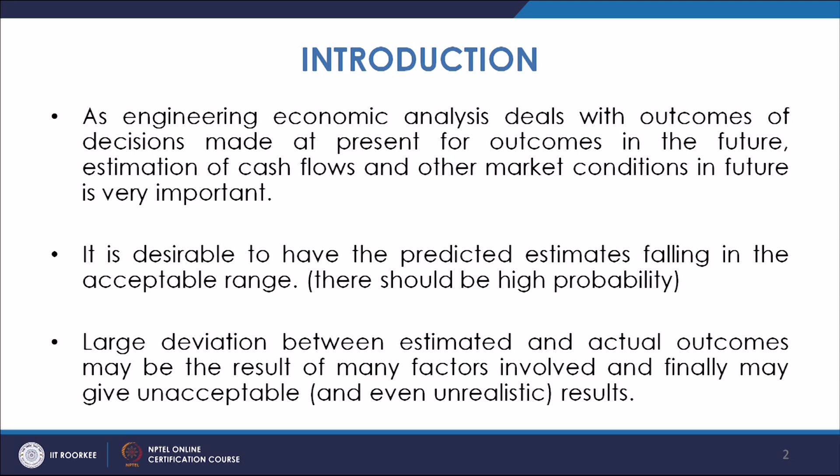Now while estimating all these parameters, if we make errors in estimating each of them, their cumulative effect can be even more. So if there is large deviation, it may result in unacceptable type of results, and there may be even unrealistic results. So estimation is a very important process, and there must be a very good estimator who should estimate more and more accurately.

Now we will discuss different aspects which are to be looked into while doing cost estimation. First is the elements to be estimated. Now what are the elements which we estimate?

Basically, first you have the estimation of output. First of all you see what output you need. Output can be, if you say manufacturing operations, number of units of liquid metal or number of forgings to be done - all these are outputs. So first of all the output has to be in mind, what output you need. Once you have the outputs, the output may even be for the satisfaction you have to achieve, or for the number of units to be sold for any particular product - all these come under output.

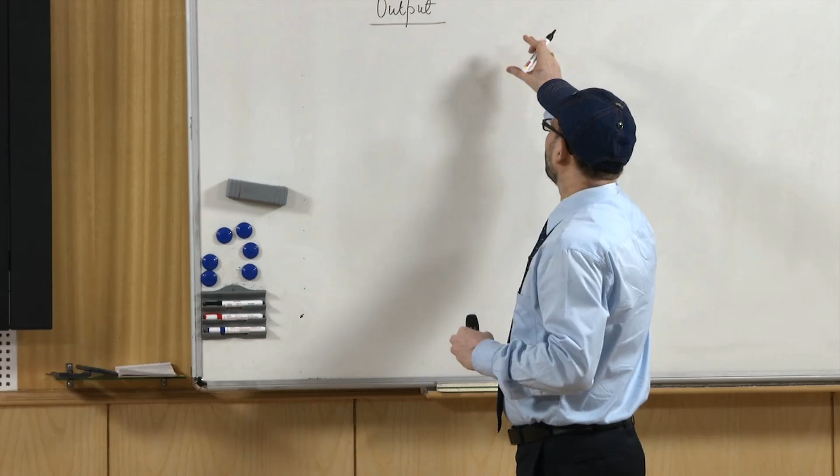That is to be estimated, and can be estimated by different processes. If these are products going into the market to be sold, it will be done by market surveys and research into that area. If these are in the area of manufacturing, you can have the idea of these outputs by weighing or by having the idea physically.

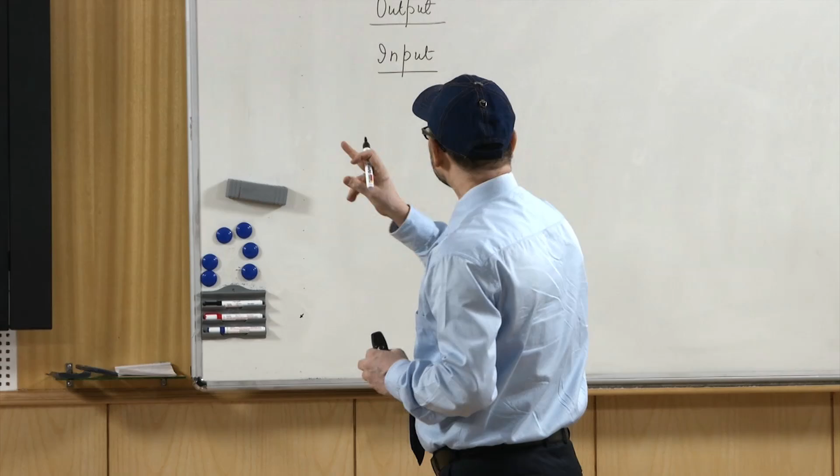Now once you have the estimation of output, you need the estimation of input. These are the elements which are to be estimated. Once you have the estimation of output, you need the input required for getting this output. Input can be in terms of raw materials if it is an engineering activity, input can be in terms of machines required for the operation to be done, input can be in any form. So basically the elements to be estimated are the main parameters which are to be estimated.

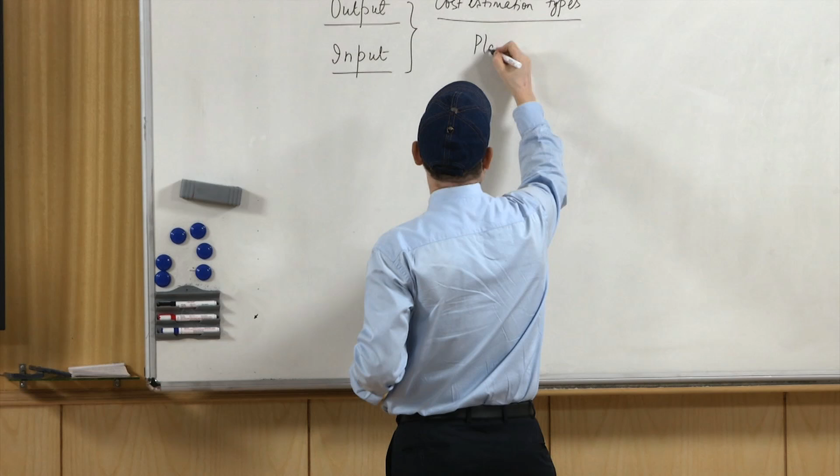Now, cost estimation types. We will discuss different situations, how at different stages different types of estimations are carried out. When we want to estimate something, when we want to have a certain output, initially we have a planning stage. In this stage, basically we do the analysis in a very broad manner, and the accuracy is of the order of plus or minus 50%.

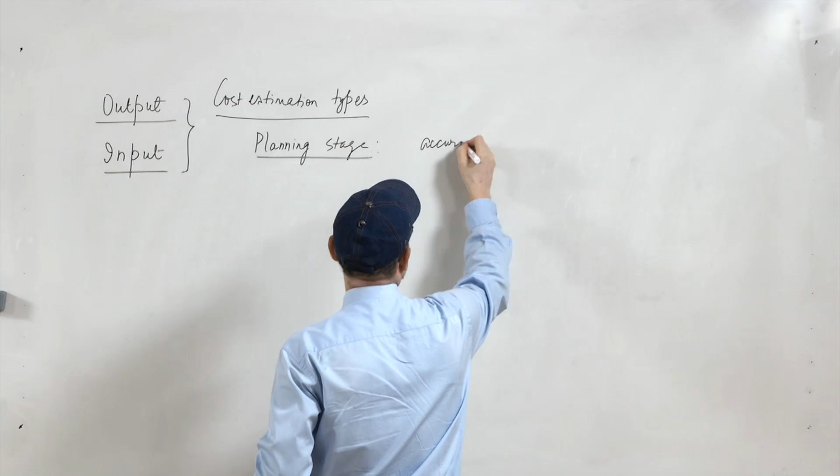This is done through conferences and symposia. We have some idea in mind, something has come into the mind of the organization, so that you develop some unit. For that there are meetings, symposia and conferences, and very broadly the estimation is done there, normally with a deviation of the order of 50%. Then comes the design stage.

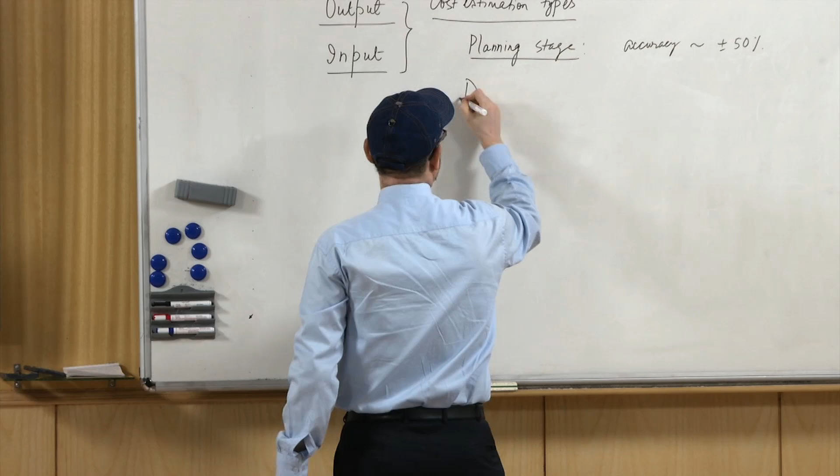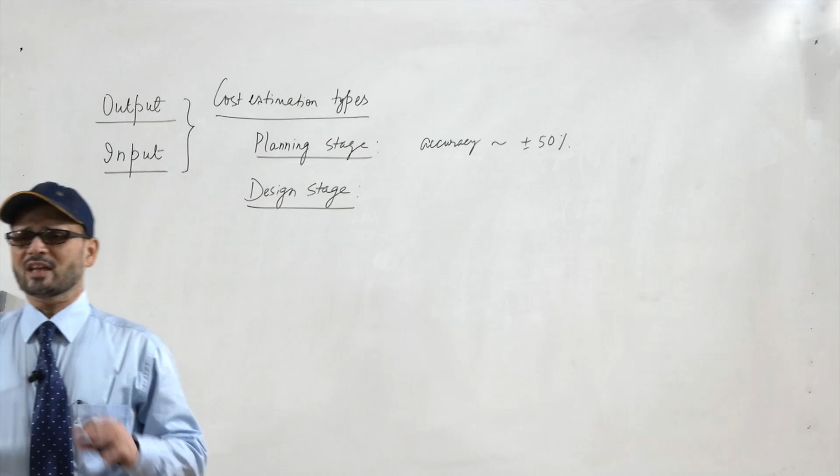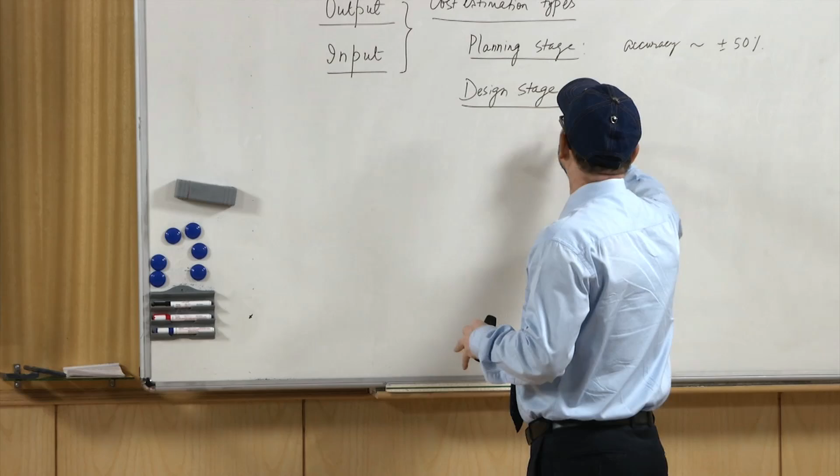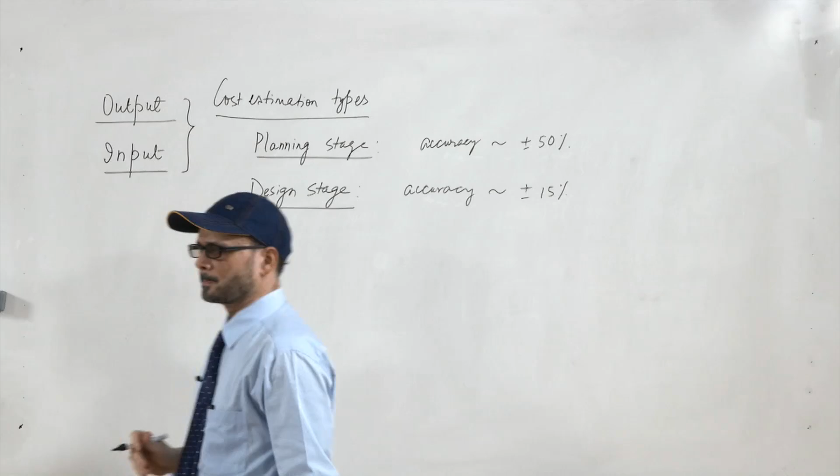Now, once you have given the OK for the project to go ahead, then comes the design stage, where it is decided which process to be adopted, how to go ahead. This is known as the design stage, and here accuracy is said to be of the order of plus minus 15%. The planning is done, how to use, which machines to be used, all that, and this is basically the design stage. Then comes the implementation stage or construction stage.

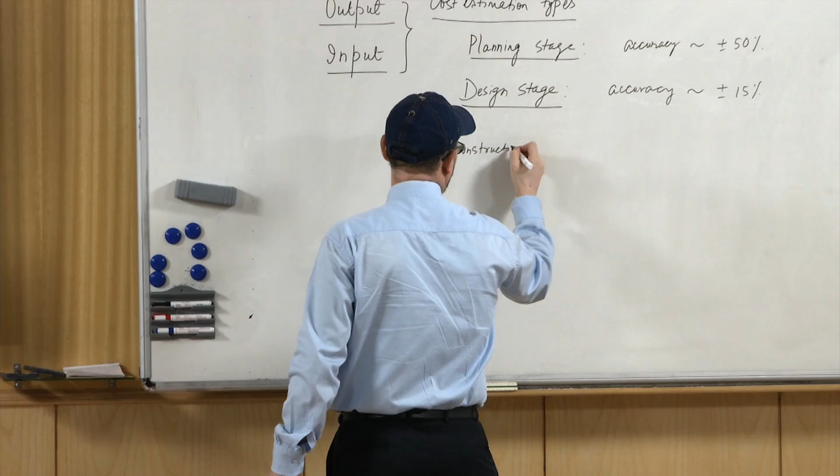Once this is also finalized, then you go for the construction of the project, and for that all the minutest level of details are to be furnished. Here come the persons who are basically the experts, they will talk about all the minute details, and the deviation here will be not more than about 5%. So, accuracy you can say will be close to plus minus 5%.

So, basically this estimation types we discuss about what kind of estimation we do depending upon the importance.

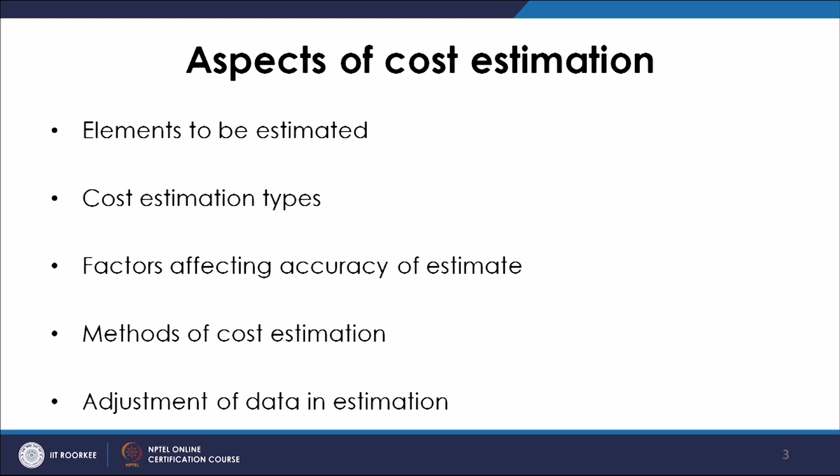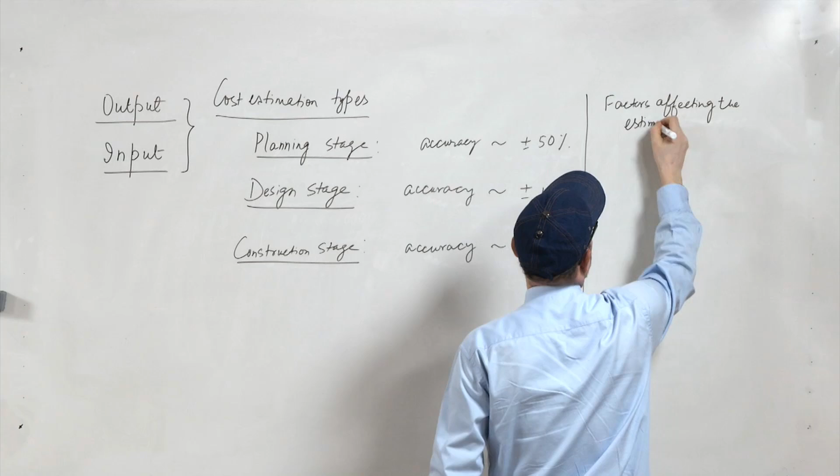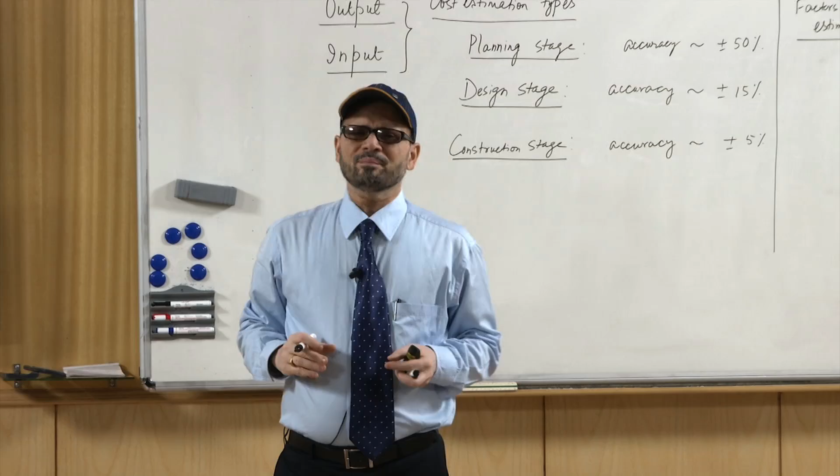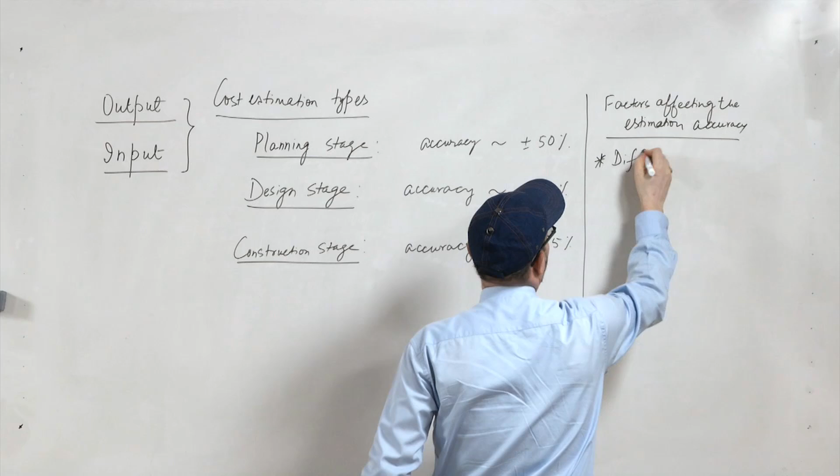Now, let us see the factors affecting the accuracy of estimate. There are certain factors which talk about how the estimation should be done. The first factor is the difficulty of estimation. It depends on what should be the level of detail you need, what is the difficulty level of the estimate. Depending upon that, you have to see what type of estimator is required, what should be the expertise of the person who should be doing it.

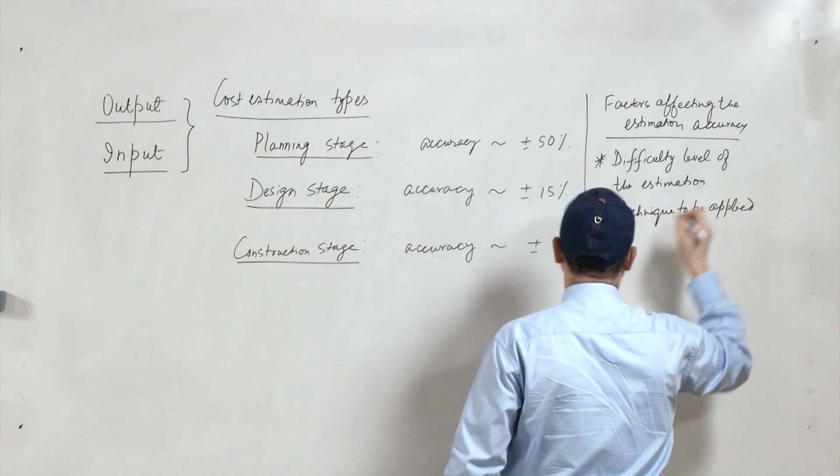Now, once you have gone through the difficulty level of the estimation, you have to see which technique should be applied. You have to be aware of all the kinds of techniques which are required for your estimation.

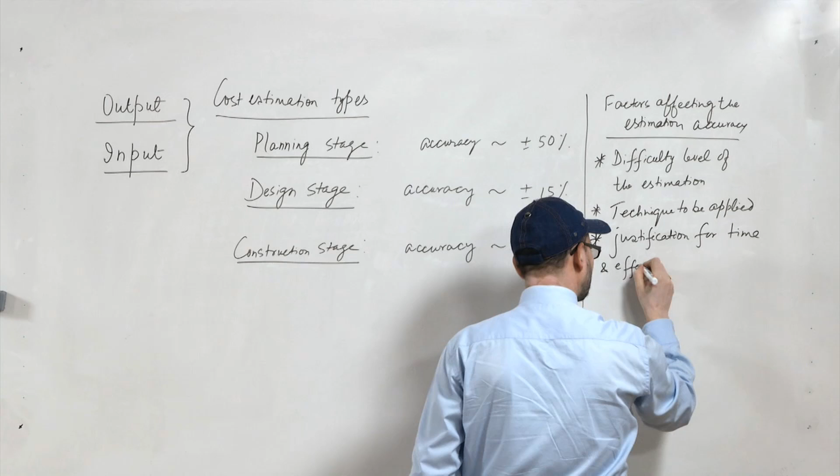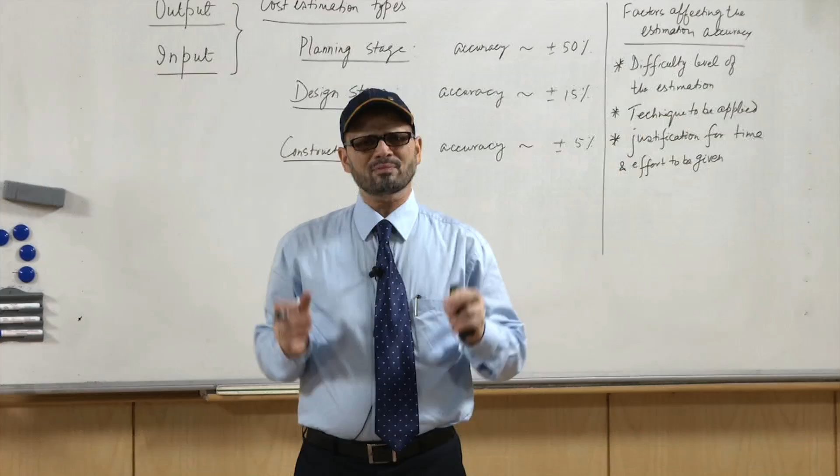Further you have to also show the justification for time and effort to be given. Basically you also have to ascertain what is the importance of this estimation. If any estimation takes a large number of resources, large resource time, in that case it must be very important work. So, depending upon the importance of the work, that justification is required to be given.

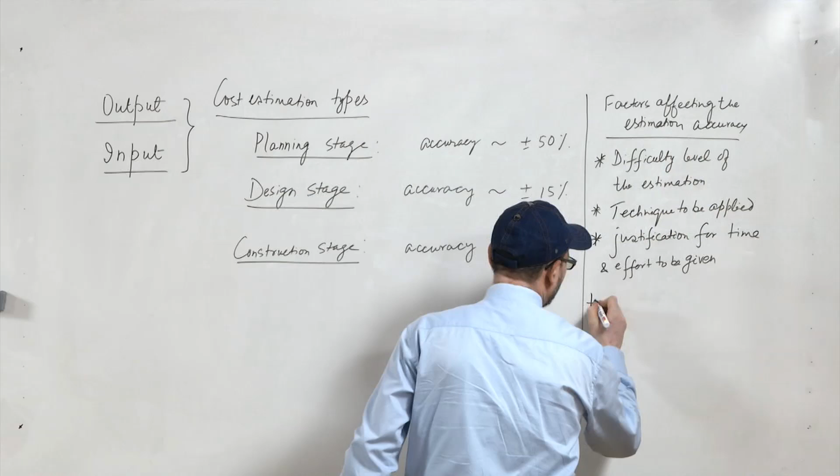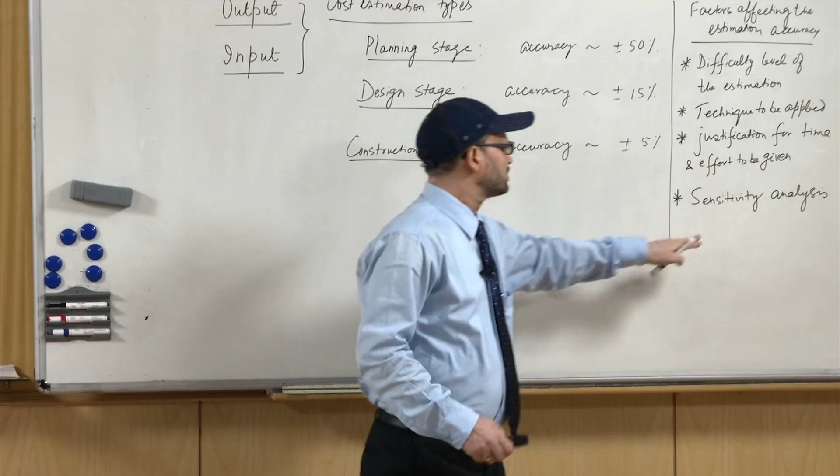Now, we also have to see the sensitivity analysis. By sensitivity analysis, it is meant that there are different parameters, and the study is to be carried out on how the end result is affected by changing the parameter levels. So, these are the different areas where you need to focus and decide what level of estimation is required to be done.

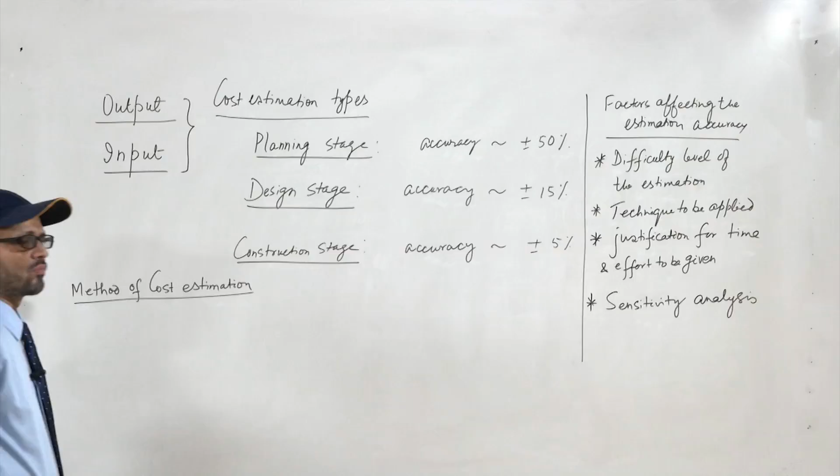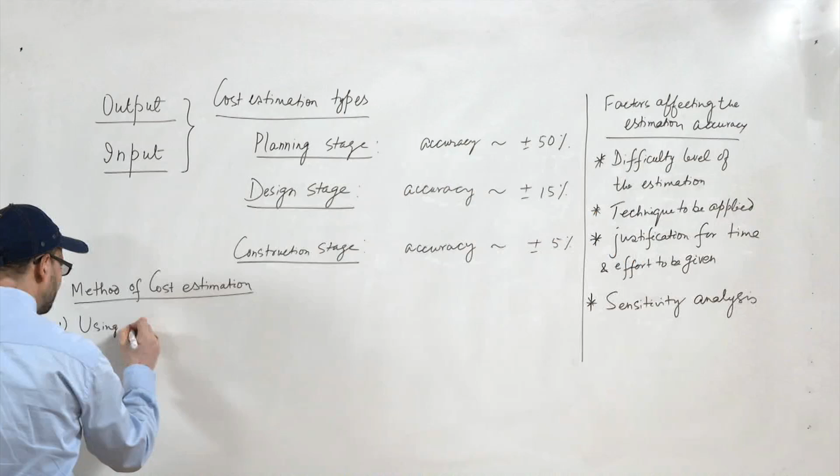Now, method of cost estimation. While we do the estimation, there are many ways by which we do the cost estimation, and first is using engineering analysis or procedure. This means that if it needs any engineering activity, you have to specify all the details in the form of blueprints, in the form of the process chart, so that proper estimation can be carried out.

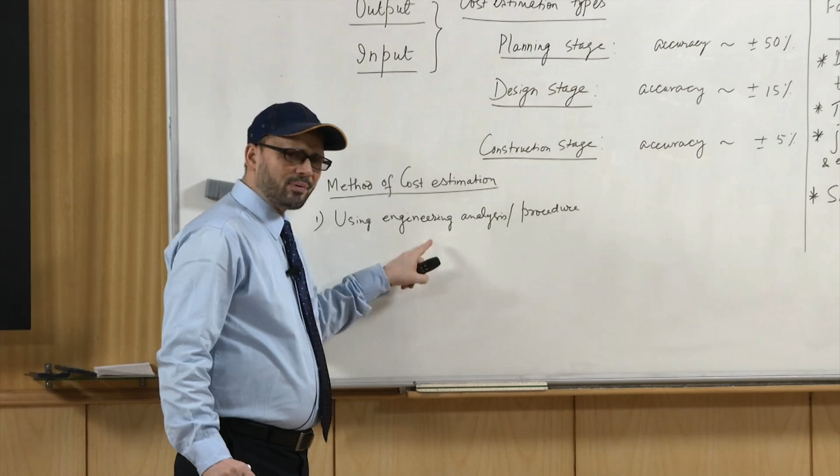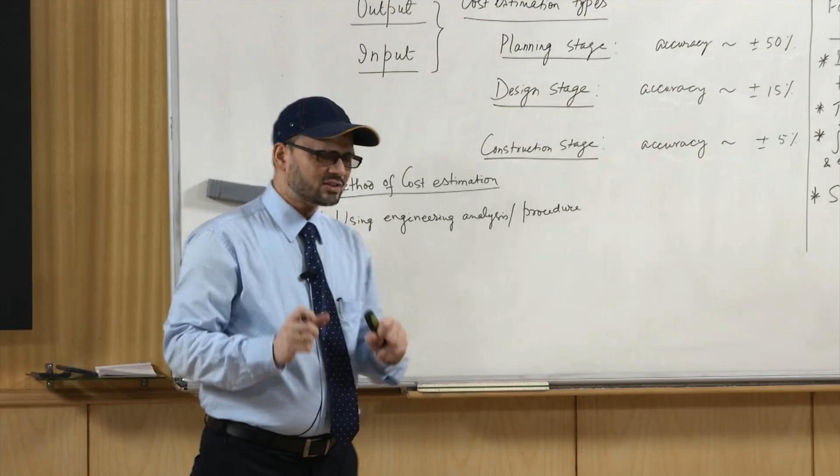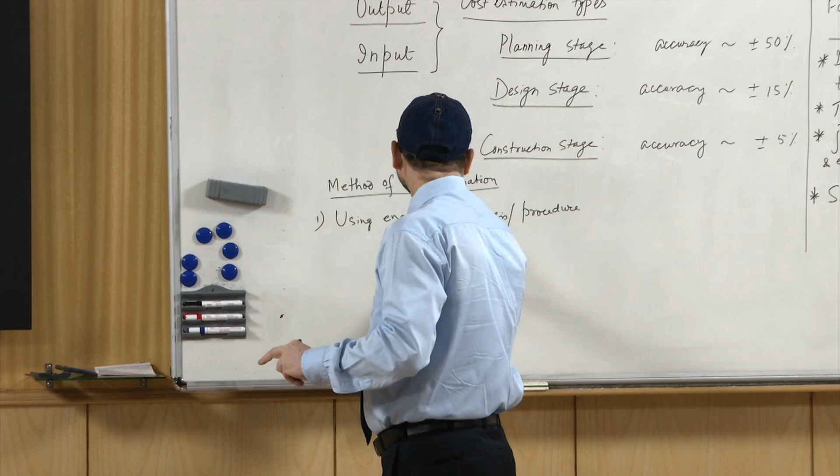Also, suppose you are doing the estimation related to selling a product or manufacturing a unit, every detail should be prepared in hand, all the engineering activity which is to be done, all these must be properly addressed, and then estimation will be easy. It will tell why any estimate has given a particular value, because all these calculations will be based on engineering principles. So, this is known as estimation using engineering procedure.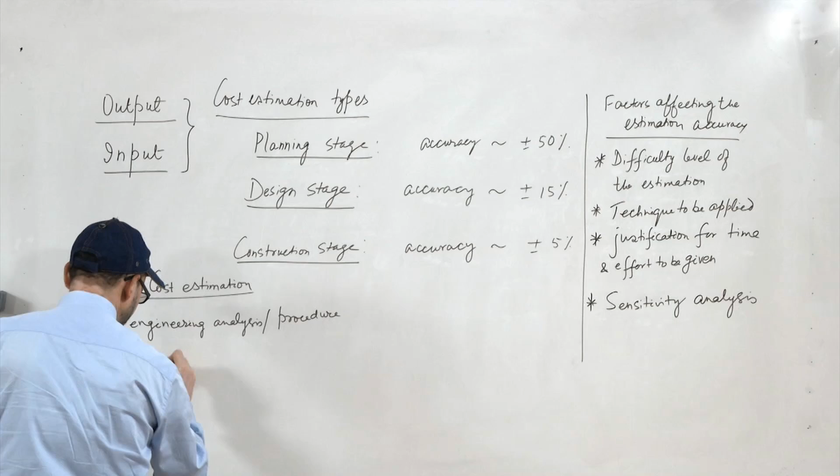Next, sometimes it is very difficult to estimate by engineering procedure, especially when you are estimating something very new. So that time we use our past experience, the study by analogy. This happens many times when, although the unit being produced is similar in characteristic to existing units, the cost is very difficult to predict. In that case, the person who is expert in that area can, by analogy, have a better estimate.

Suppose the first time a helicopter is to be made, an estimation of the cost of a helicopter is to be made. Now, this helicopter has not been manufactured earlier and there is no idea what cost will be incurred in making a helicopter.

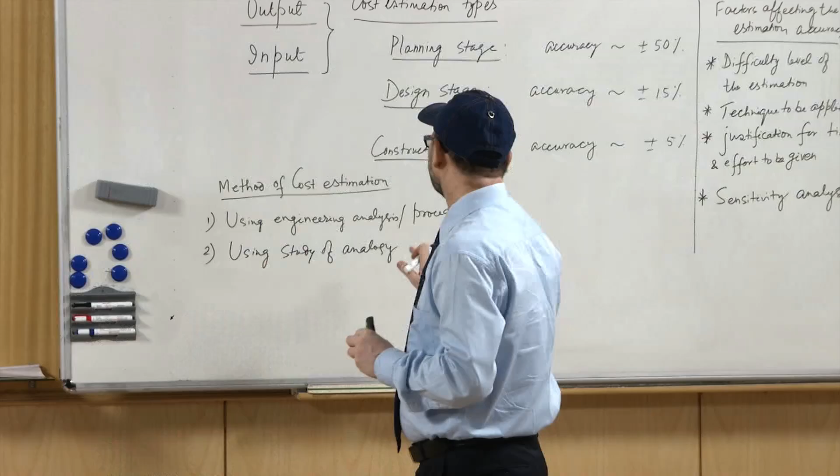It is also known what will be the cost incurred when you make an aeroplane. So a person who is expert in the knowledge of aeroplane making will basically model and give the idea that if you are making a helicopter which has a certain capacity, using a fraction of the material used in the aeroplane, or an engine much smaller than the aeroplane's engine, by analogy he can do the analysis and give a better estimate of the product he is estimating.

Now we will discuss about adjustment of data in estimation. We need many a times to adjust the data.

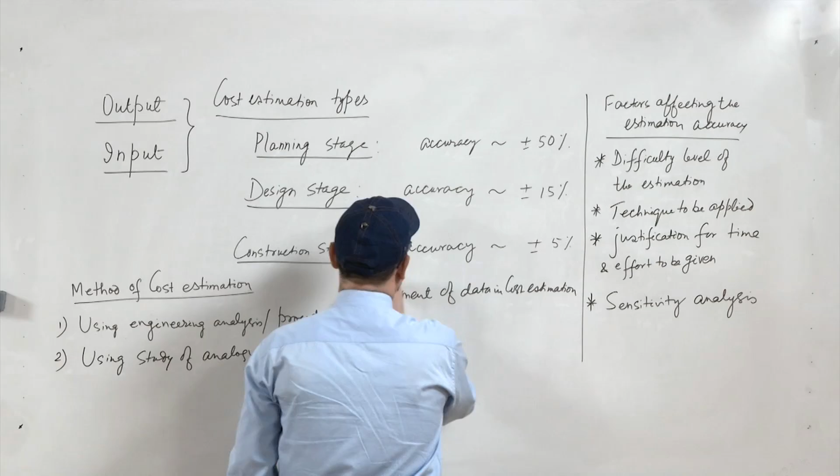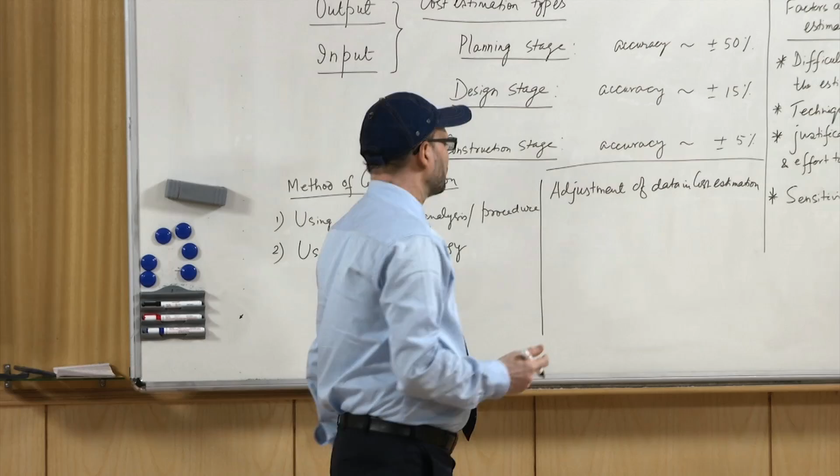You have different categories of data which are to be handled, and you need to put the data of one category at one place. If you are using materials for a particular part, you should know that this belongs to a certain category. So basically data adjustment of different categories is required. First of all, you should know how to categorize the data.

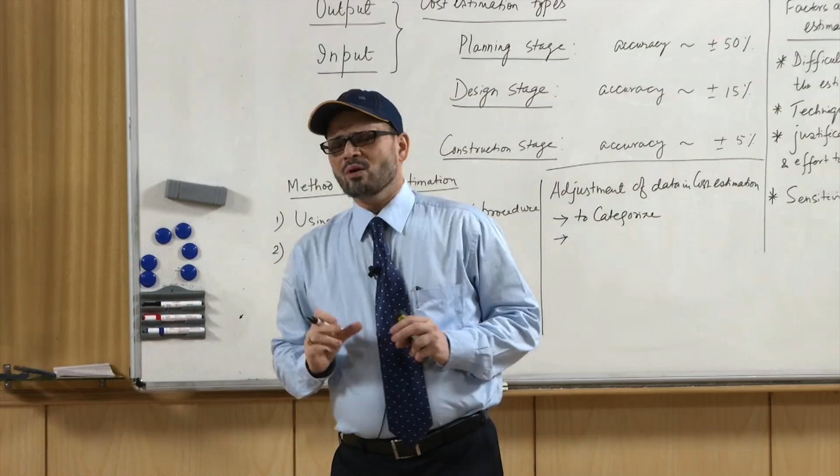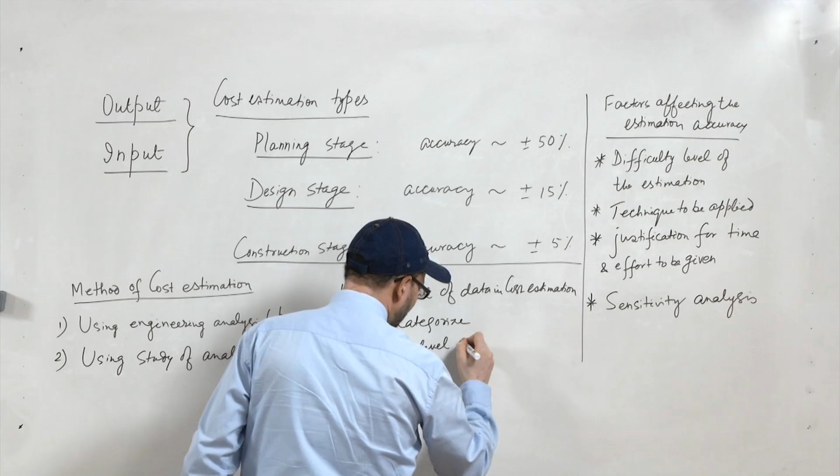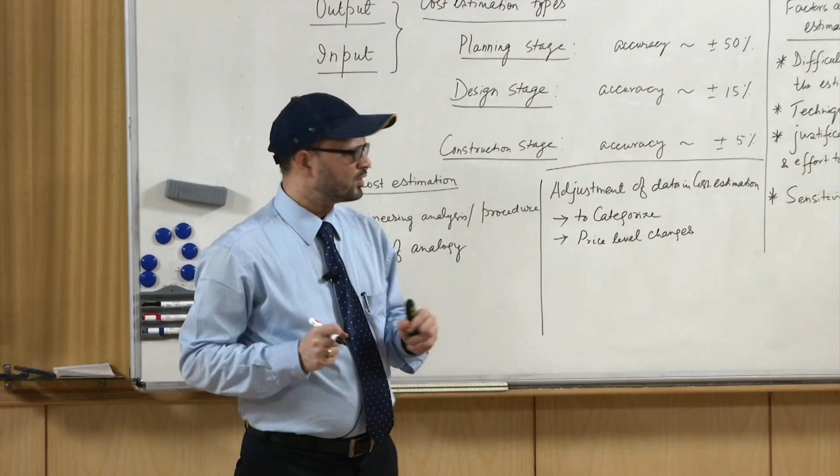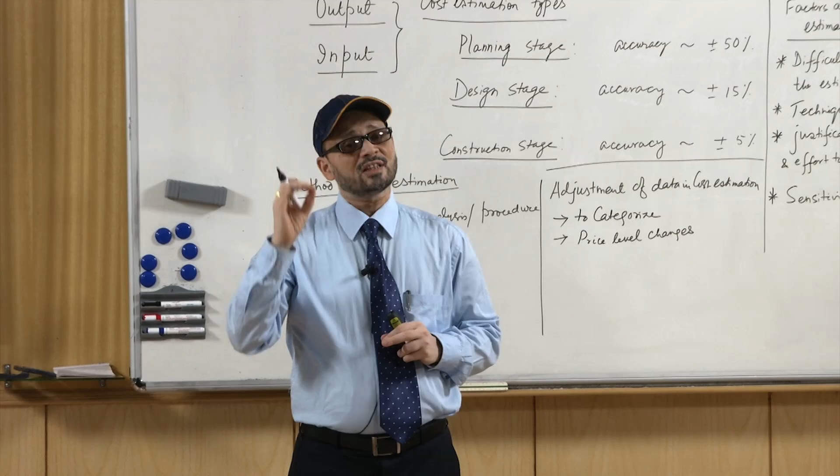The next important thing while discussing the adjustment of data is the effect of inflation or price level changes. Because economic analysis is done for any estimation in future, and since every transaction involves the use of money, the time value of money has to be kept in mind. So with time, what will be the effect on the worth, or the cost of units in future, this is to be kept in mind.

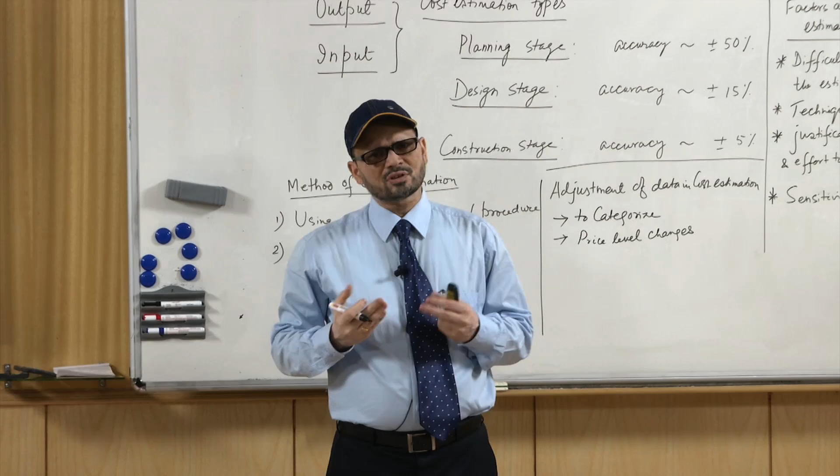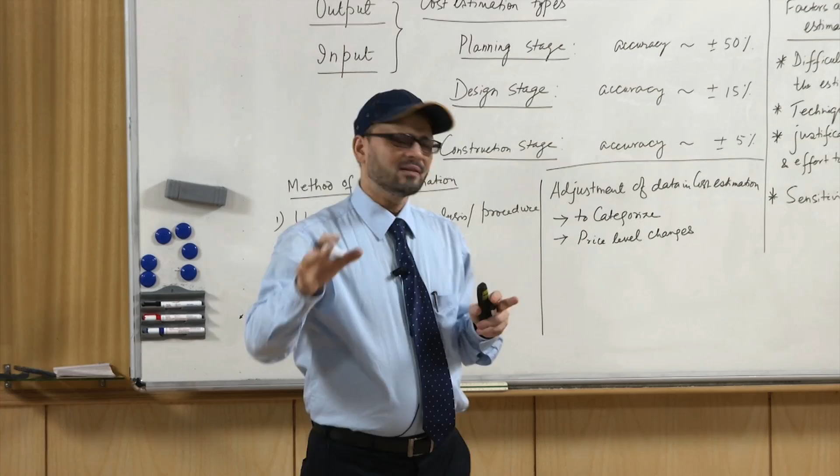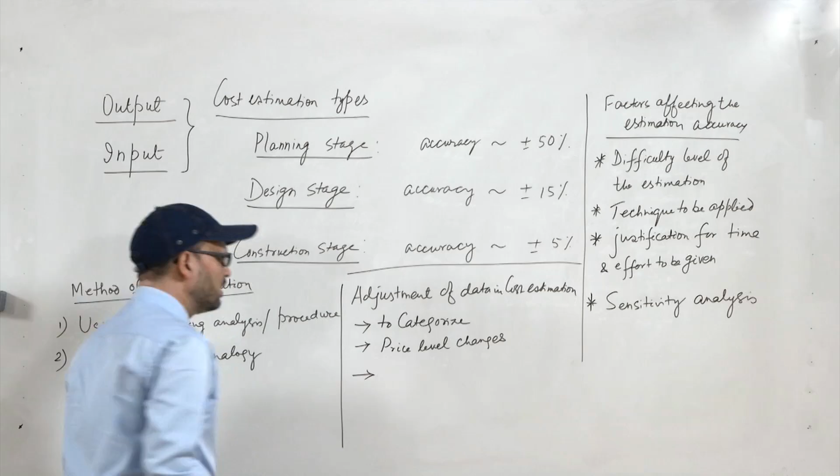So price level changes are to be kept in mind. For that, you need certain past data which talk about the inflationary changes, the change in the value of money in the past few years, and based on that you can predict certain changes in the value and price. This way, if you take this into account, you can come to a reasonably accurate cost estimation.

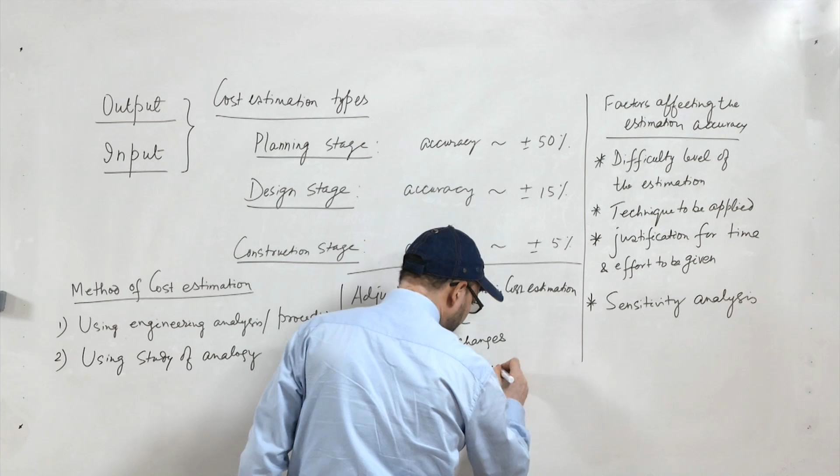This learning is basically a process which means that the direct labor hours required to make any component, when you are making this component for the first time, takes certain hours. But as you go on increasing the number of units and making these units, especially for those items which are very large in size and take a large amount of direct labor hours...

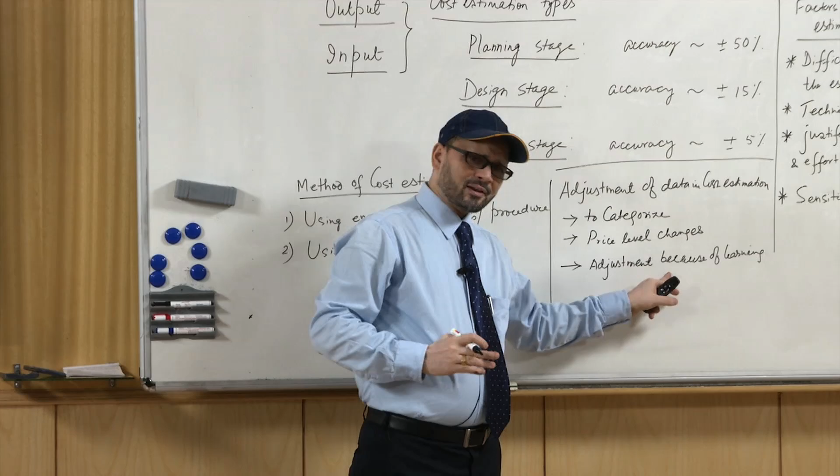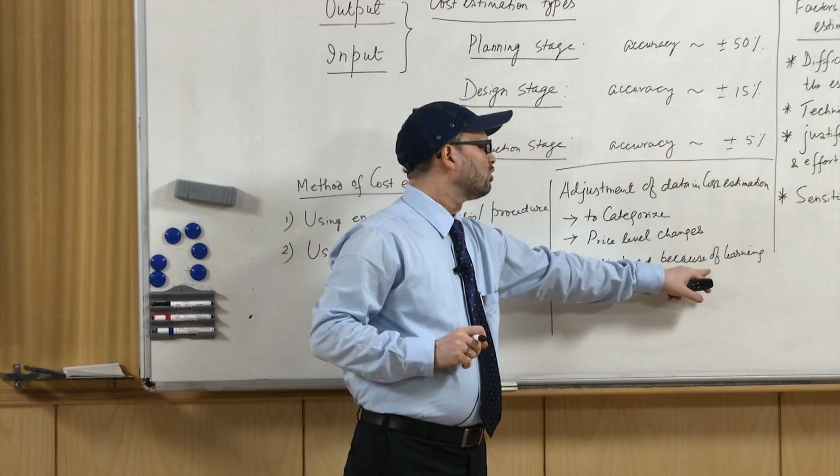It is seen that as you go on doubling the number of units produced, the direct labor hours reduce by a certain factor. This is known as the concept of learning. The amount of direct labor hours may reduce by any factor, it may reduce by 80%, it may reduce by 70%. If it is reducing to 80%, it is known as an 80% learning curve.

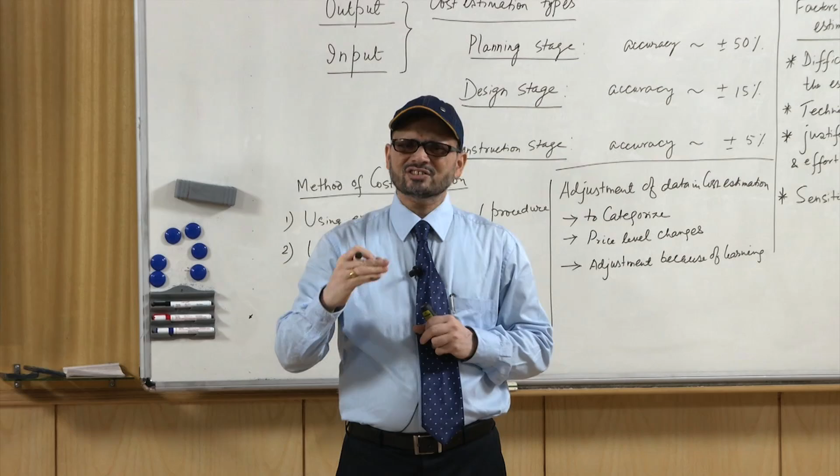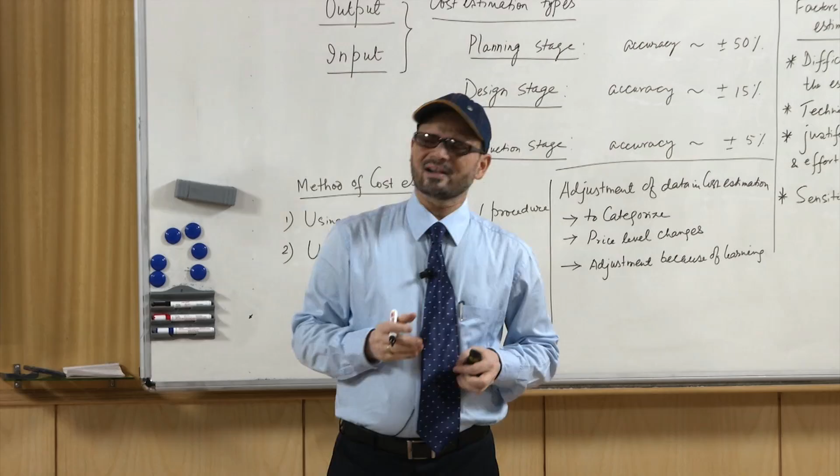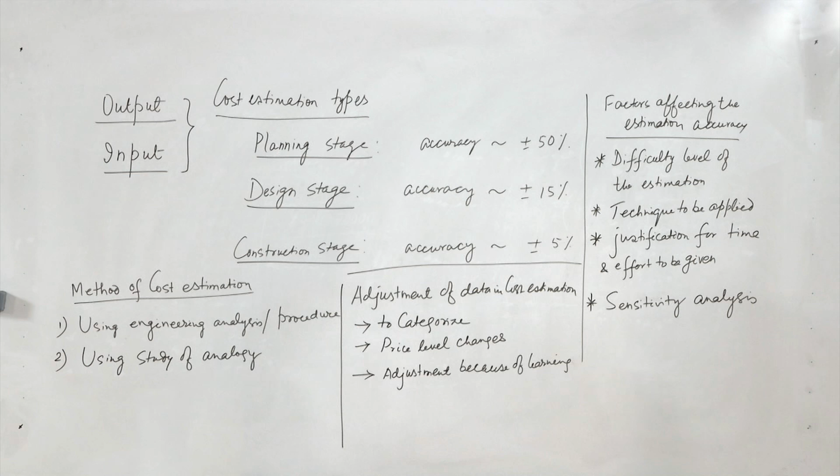This means if for the first unit you are taking 100 direct labor hours, the second unit using an 80% learning curve will take 80 hours, and the fourth unit will take 0.8 times 80, that is 64 hours. So this is the learning curve. We will see how this learning curve can be used to adjust the cost data while making any unit in the future. Let us discuss about the adjustment because of learning.

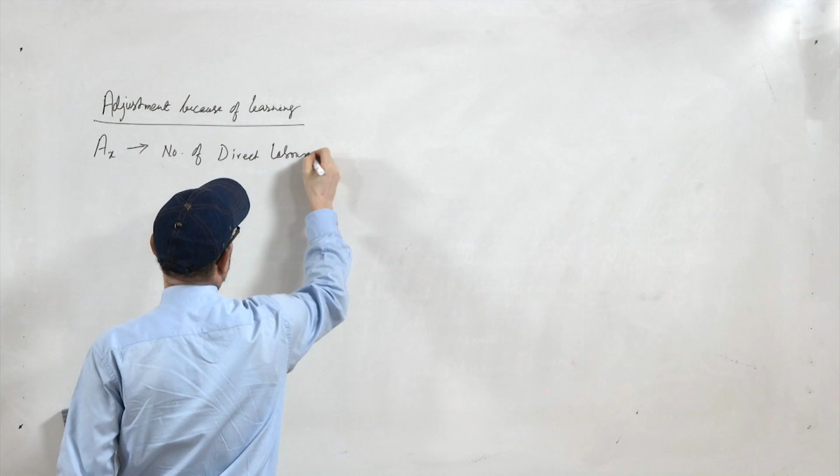Now let us say you are making any product where Ax is the number of direct labor hours required to make the xth unit. X is the unit number. So A1 means the labor hour required for making the first unit, A2 will be for the labor hour required for the second unit, and so on. Now F is the number of direct labor hours required to make the first unit.

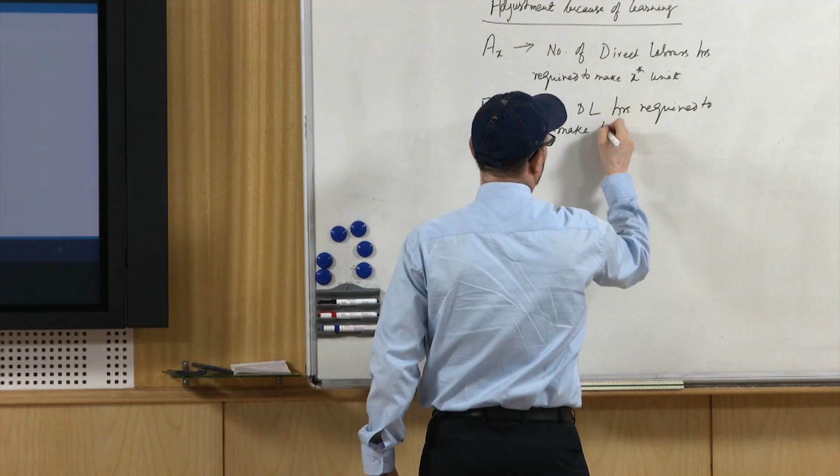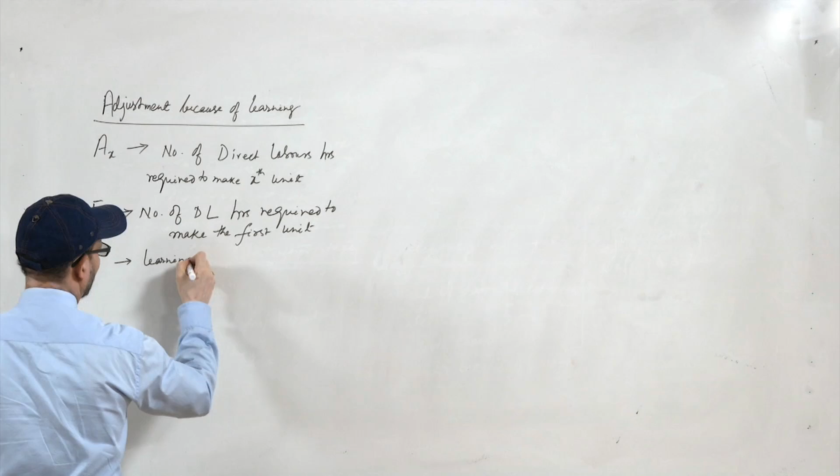Now let us say alpha is the learning curve. So what we see is, if we see Ax as f into alpha to the power 0, when the first unit is produced, that is when x is nothing but 2 raised to the power 0, that is 1. So for first unit, when x is 1, the number of direct labor hours is f, and it can be written as f into alpha raised to the power 0, where x is 1, so it is nothing but 2 raised to the power 0.

This is based on the assumption that every time you double the production, the number of direct labor hours required will be some factor times the labor hour required in the previous time. So if suppose you take A2, Ax will be f into alpha 1, and it will be 2. So you can write x as 2 raised to the power 1, that is 2. So this one comes here and this is 2.

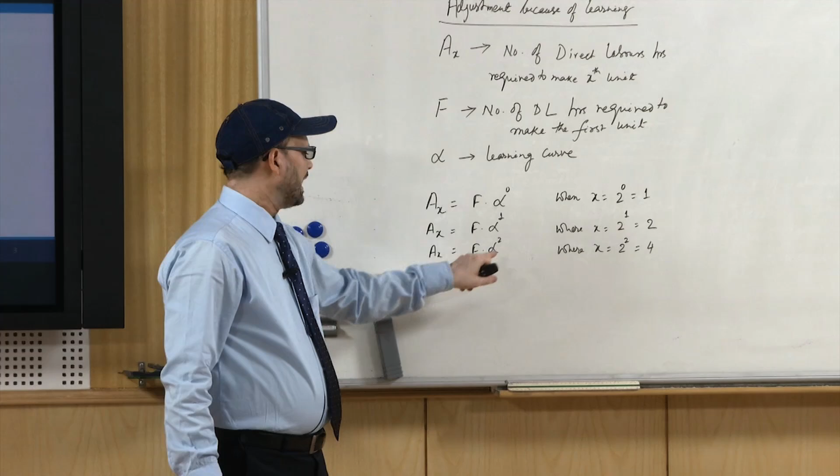So you can further proceed, Ax will be f alpha raised to the power 2, where x is 2 raised to the power 2, that is 4. So when the fourth unit is produced, you see that it will be f alpha times alpha. So if it goes like this, we can write Ax will be f into alpha raised to the power d, where x is nothing but 2 raised to the power d.

Now we can see, we can solve this further. Let us take the log on both sides. So on one side we have got Ax is equal to f into alpha raised to the power d. So we can write, taking logarithm on both sides, log Ax will be log f plus d log alpha. So d will be equal to log Ax minus log f divided by log alpha.

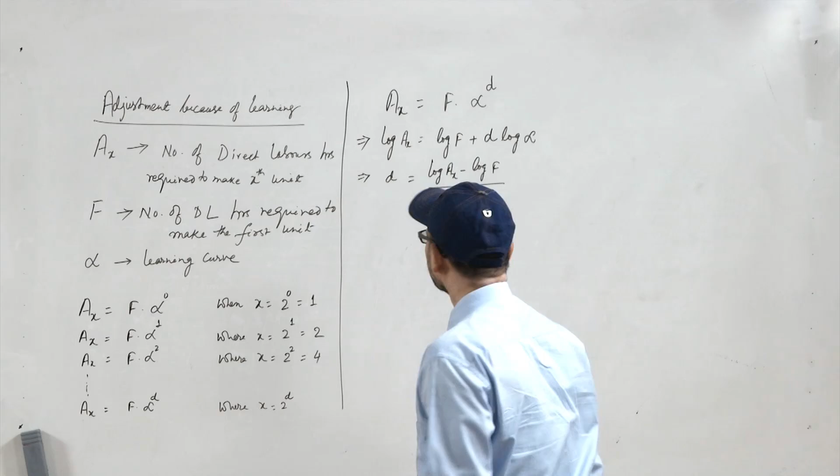On the other side, you also get x equal to 2 raised to the power d. So in this also, if you take logarithm on both sides, log x will be d log 2. So d will be equal to log x by log 2. Now this d and this d will be equated. So log Ax minus log f by log alpha will be equal to log x by log 2.

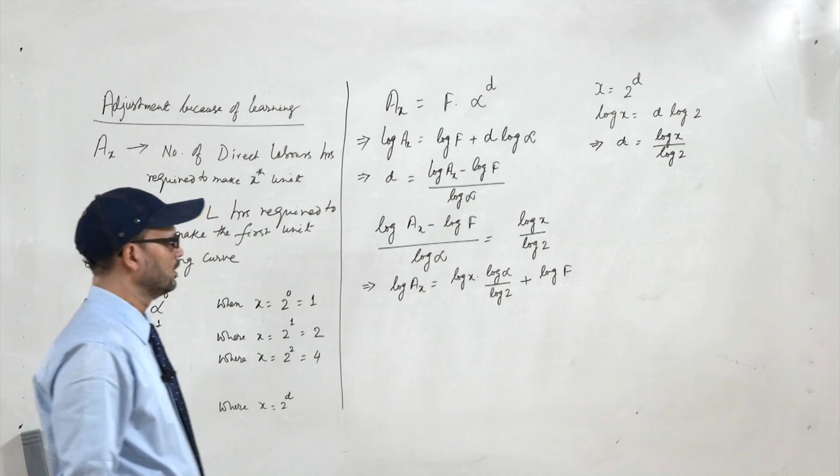Now we can get the values. Log Ax will be equal to log x into log alpha by log 2, plus log f. Now if we take log alpha by log 2 as n, this can be written as log Ax equal to n into log x plus log f, if we take n as log alpha by log 2.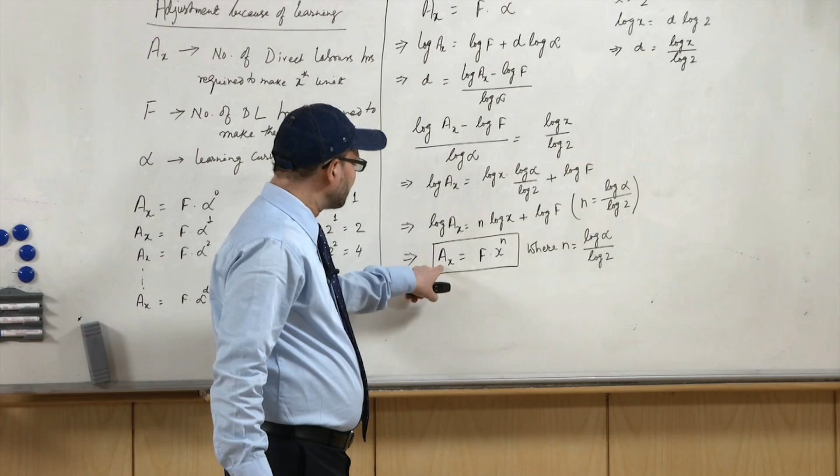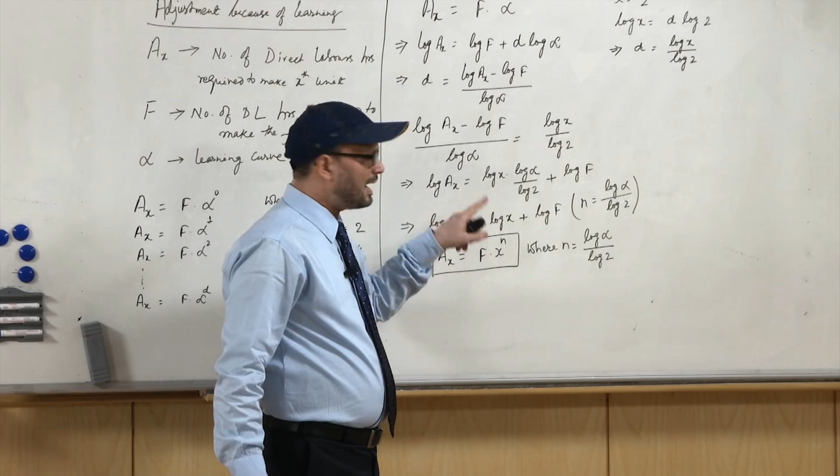So further you can write as Ax equal to f into x raised to the power n, where n is log alpha by log 2. So this is the expression by which you calculate the value of direct labor hours required to make the xth unit when you know the number of direct labor hours required to make the first unit, and x is known to you, and it is also known to you the value of n, which is nothing but log alpha by log 2. Alpha is the percentage value of the learning curve. So if it is an 80% learning curve, it will be log of 0.8 by log of 2, and you will have the values and you can keep it here.

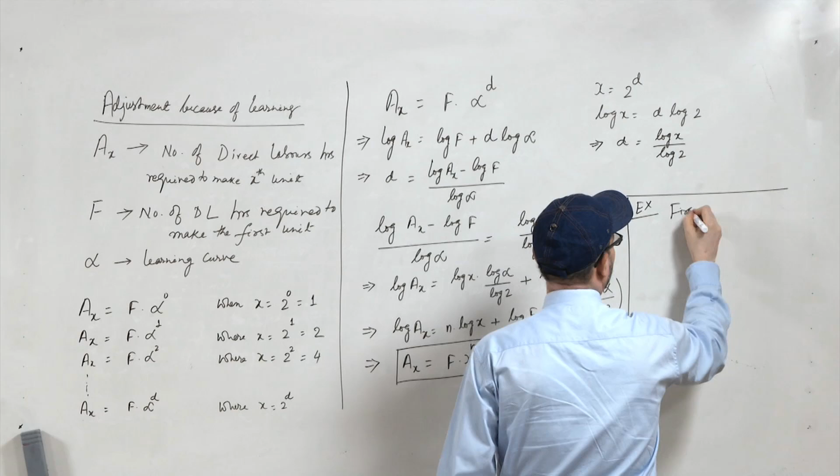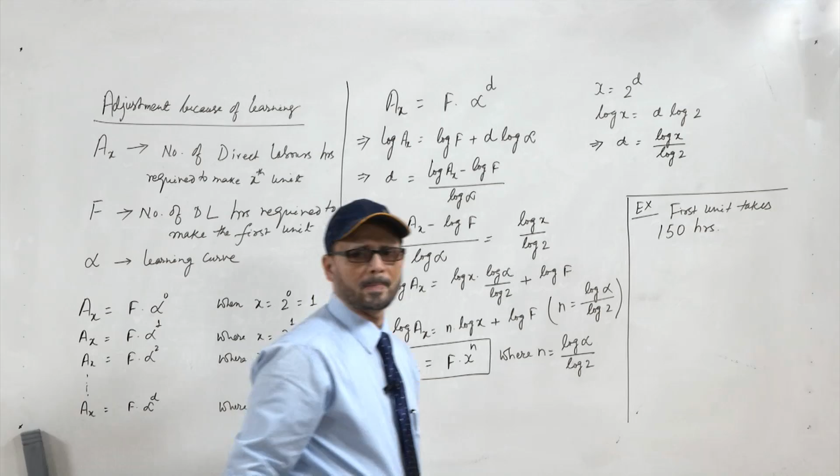Now let us take an example. Suppose the first unit takes 150 hours using an 80% learning curve. Find the direct labor hours required to make the 6th unit. So in that case, what you do is you have to find A6, and this will be equal to 150 multiplied by x, which is 6, raised to the power n, n will be log of 0.8 by log of 2.

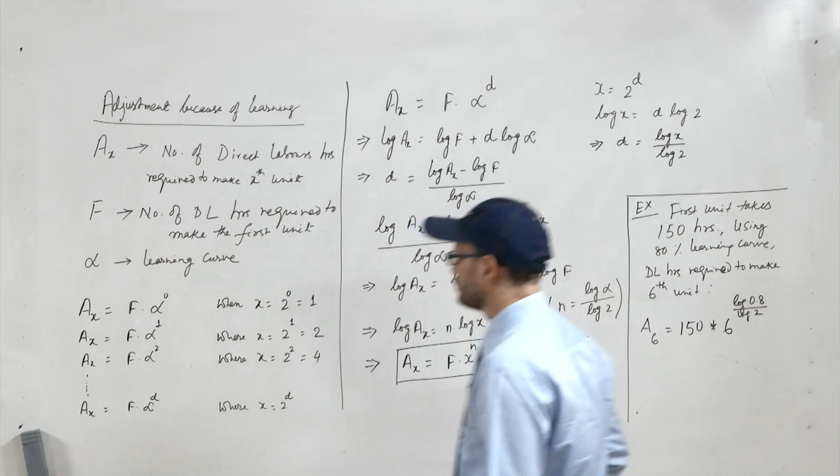So if we take that, it will be minus 0.32. So you can do 150 into 6 raised to the power, divided by, log 0.8 by log 2 is minus 0.322. So you can have this value, that will be the value for this 6th unit. So this is how you can compute the value of direct labor hours required for the 6th unit. Thank you.